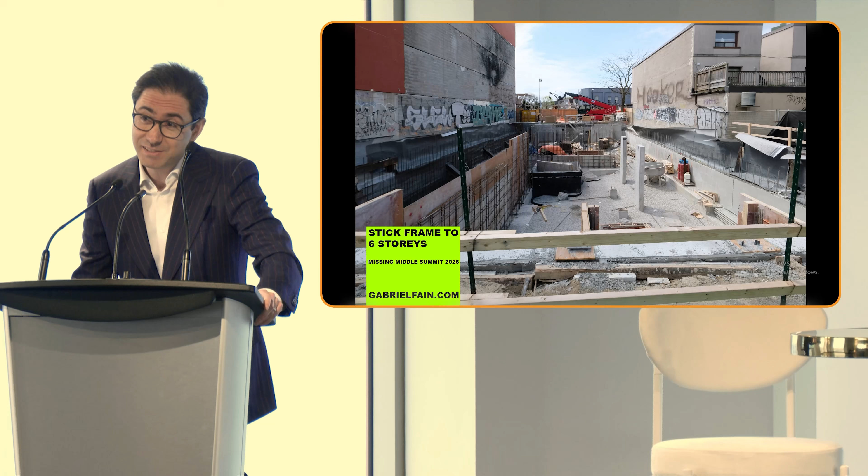This is a picture I took last week of our project, which Chris spoke about. It's close to his office, 2760 Dundas. I think it's one of the only, if not maybe two, stick frame six-story buildings under construction right now.

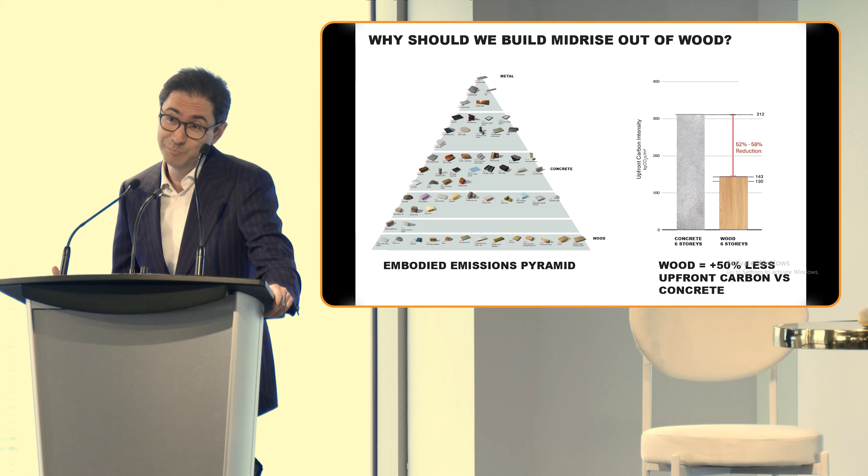This is where the conversation starts for me. If we care about the health of our cities, we really need to think about what kind of materials we're building out of. Concrete and steel have incredible carbon embodied emissions. When we compare a six-story building built of concrete to one built of wood, there's about a 50% reduction in the upfront carbon emissions of the wood building. So we really have to think about fundamental questions about sustainability having to do with materials.

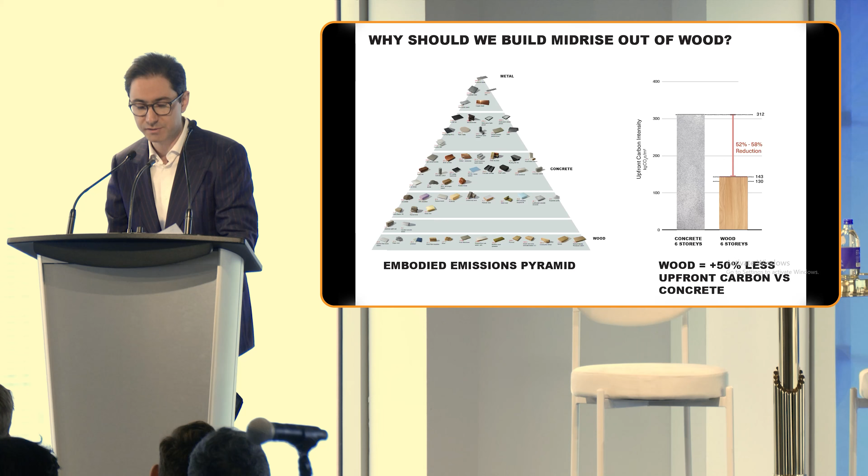I'm interested in simplifying buildings, and for me the only way to do this is through wood construction, because ordinary construction systems scale well. They rely on local labor, local materials, local supply chains. They're lighter, faster, and cheaper, and as the previous speaker said, time is money.

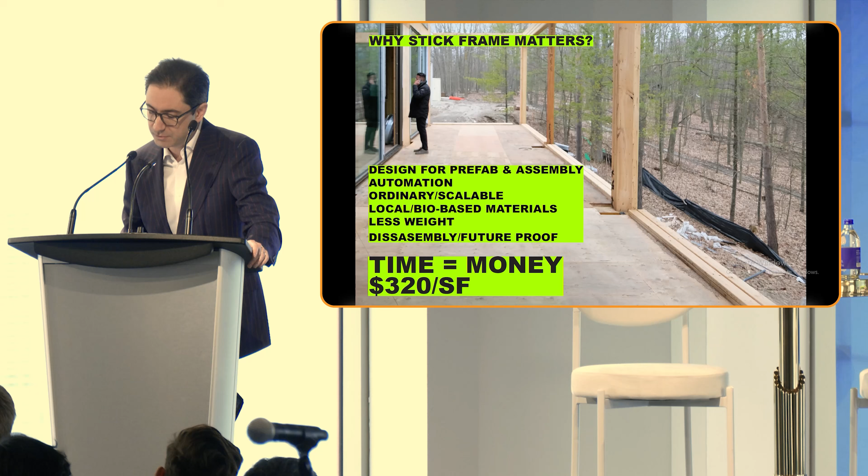A lot of people are going to ask, well, what's the cost of this? Our Dundas project is coming in at around $320 a square foot, and that's including all the complexities of the below-grade construction, which includes significant shoring.

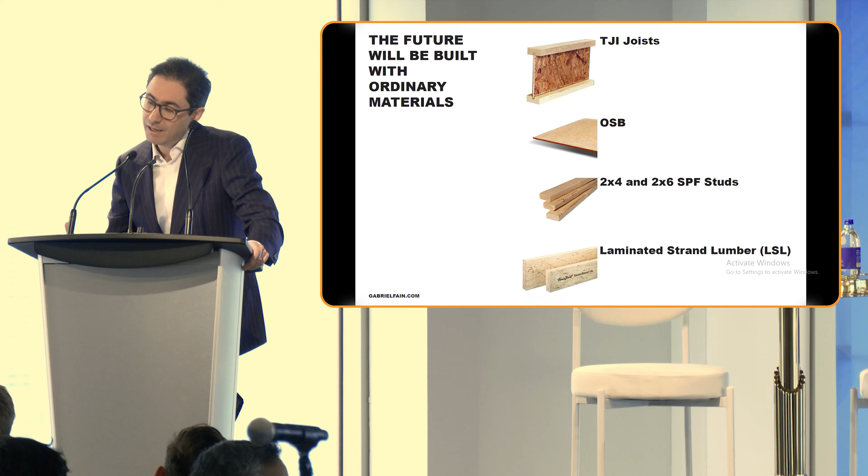I think the future will be built like this, with ordinary materials: TJI joists, 2x4 and 2x6 studs, LSLs, OSB sheeting. This is the future of mid-rise, not some exotic materials coming from somewhere else—it's right here in our own backyard. The only change required is the level of coordination we need, and the kind of building modeling and assembly process.

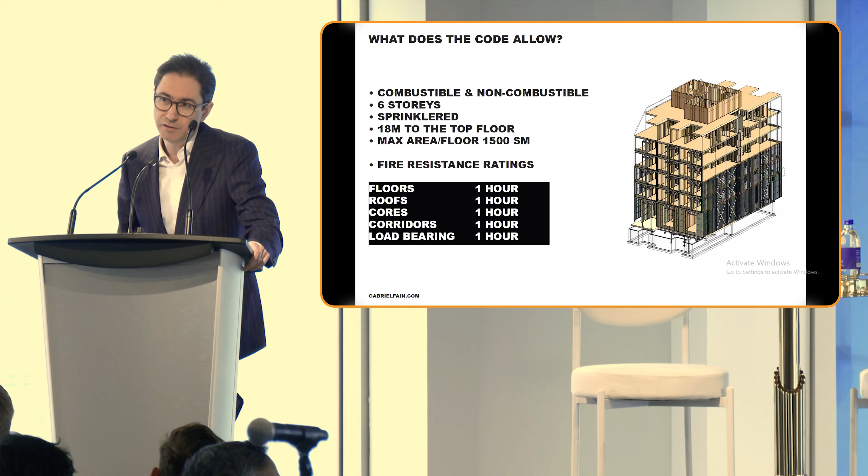So what's stopping us from building this way? There's a misconception that the codes don't allow us to build at this scale, but in fact, in 2015 the OBC was changed to allow six-story wood buildings, as long as you follow certain parameters: sprinklered, 18 meters to the top floor, maximum floor plate areas, and fire resistance ratings typically of 1 hour within the residential separations.

There are significant challenges to building this way. The three top challenges are sound, fire, and moisture—there are many others, but those are the top three. You really have to be rigorous in how you design these buildings. But these are solvable technical problems, not conceptual problems we need to overcome.

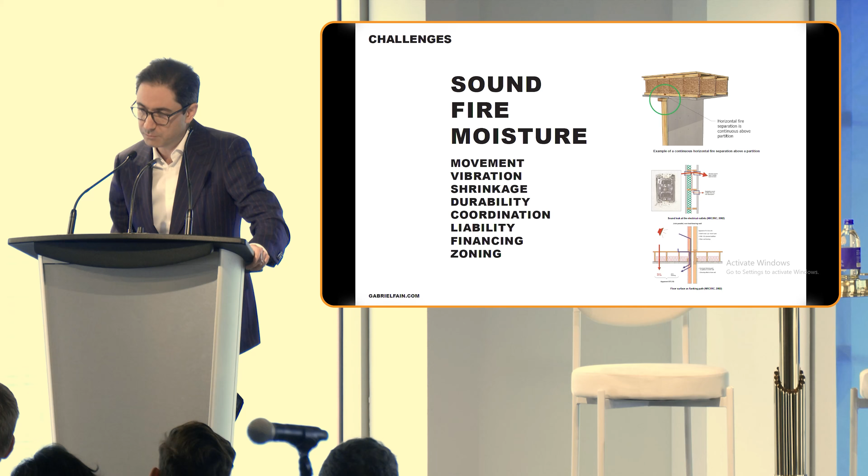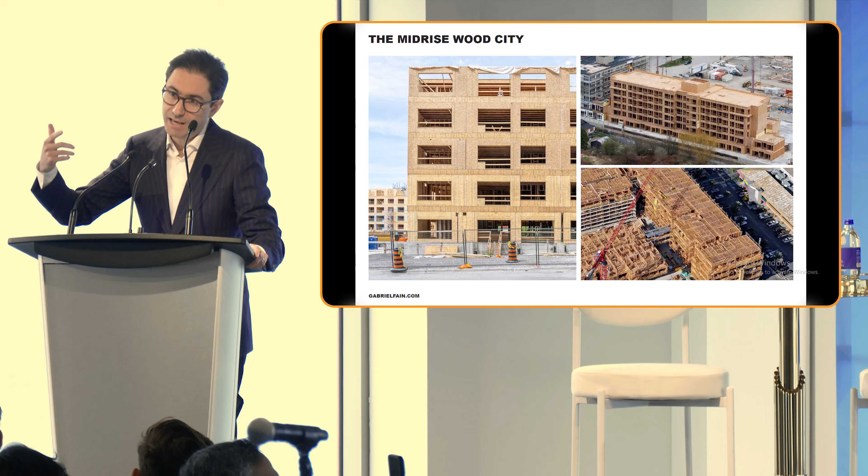In many ways, Toronto is really behind on this type of construction system. In BC, where many of these photos are taken, they've been building mid-rise wood buildings for many years, even before 2015. Once a couple of successful projects get built, the industry rapidly gains confidence, trades gain confidence, and even municipalities start to understand what's happening, and a new normal begins to emerge.

So the question is, what could Toronto actually look like if we embraced projects at this scale? Not isolated pilot projects, but entire corridors of wood mid-rise buildings, kind of like how we saw the housing stock of the early 20th century being built in the city.

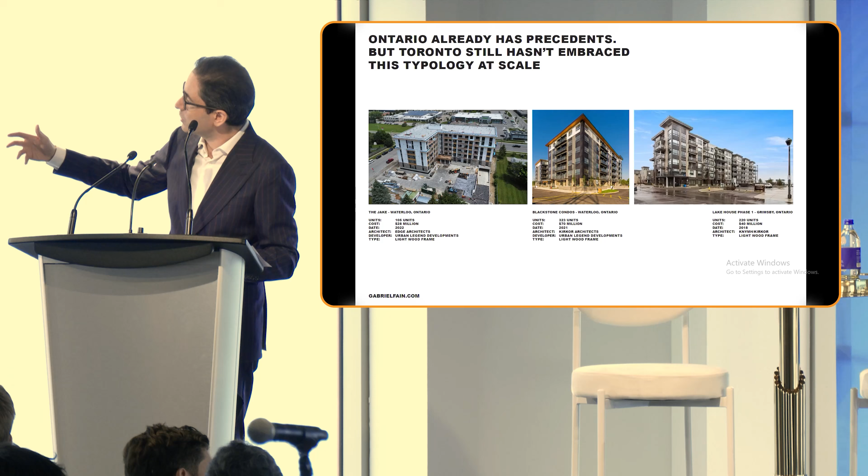What's striking is how few examples I could find in Toronto. In fact, I couldn't find any examples in Toronto of stick frame six-story buildings. We're finding more of them in secondary markets like Waterloo and Grimsby, which obviously benefit from larger sites and larger staging if they are prefabricated.

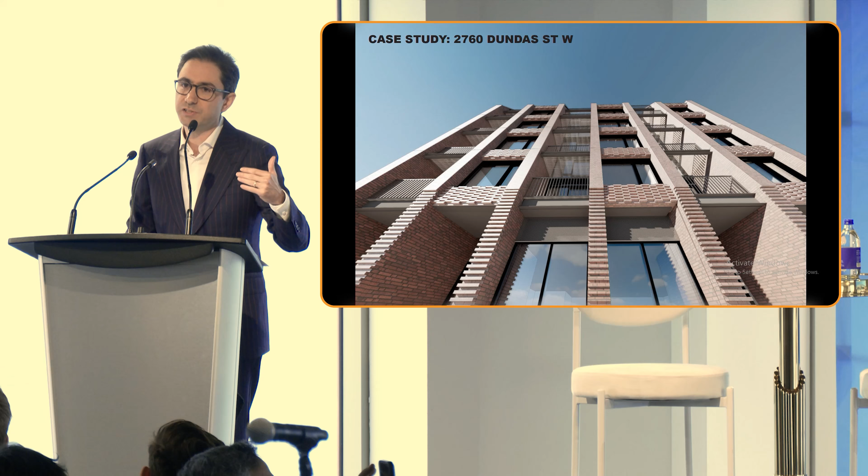So our project at 2760 Dundas really became an opportunity to test these ideas at scale. The project forced us really to think differently about structure and also design.

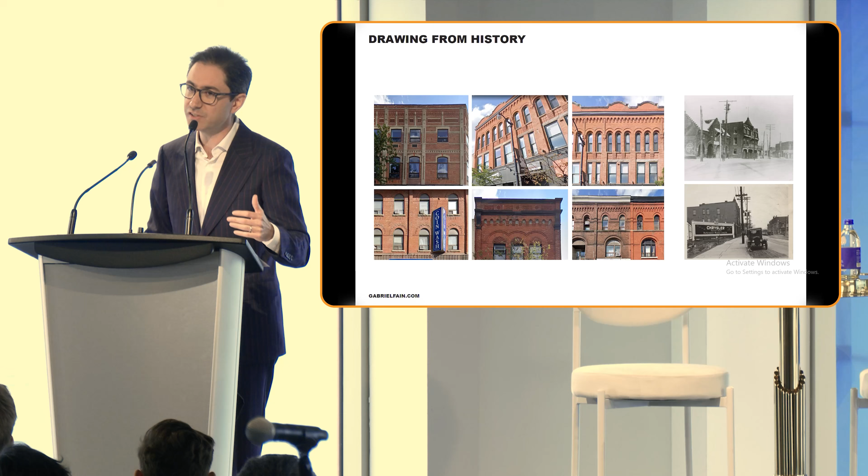The project's located in the Junction, which is really important to understand the kind of history of these kinds of buildings, because many of Toronto's older buildings were timber buildings clad in masonry. So there's a kind of logic and rhythm to these buildings which feels timeless, but really inherently their logic is based on their construction system.

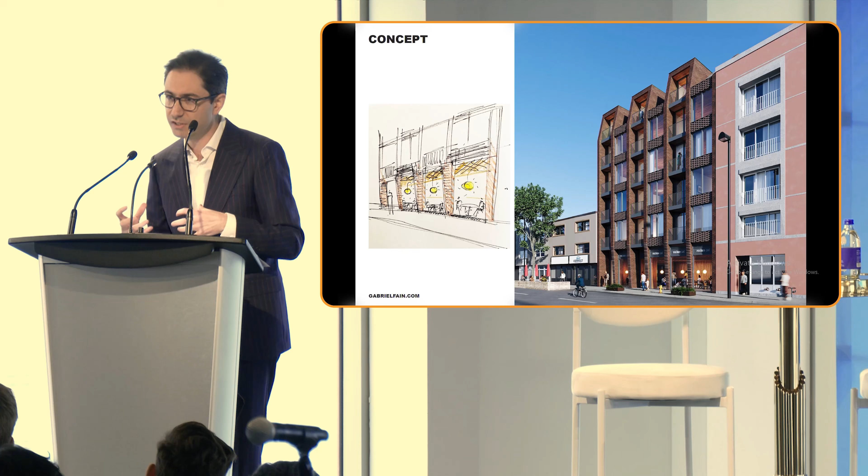So the design really wasn't about inventing something new. It was taking the DNA that we already have within the history of these buildings and adapting them to new technologies using traditional construction systems.

And so this is where I think architecture starts to change, because we really have to think differently about how we plan these buildings. Wood inherently has different kind of lateral systems than concrete. You have to think differently about how you stack the plans. Alignment becomes really key, and simplicity becomes really key.

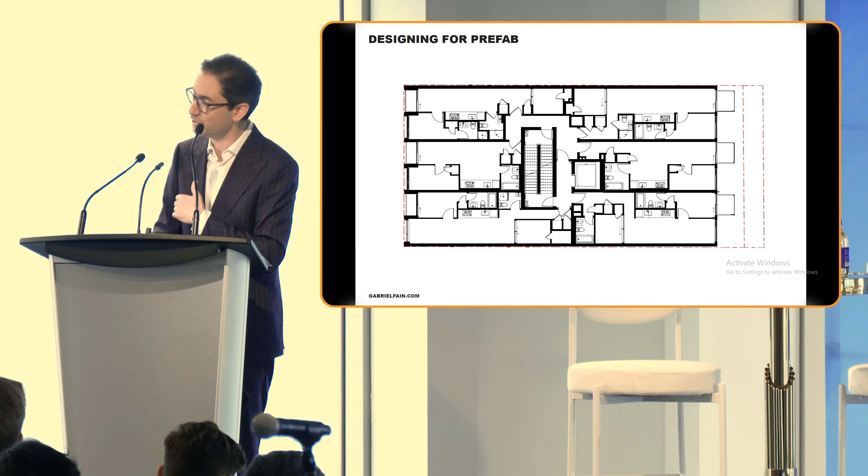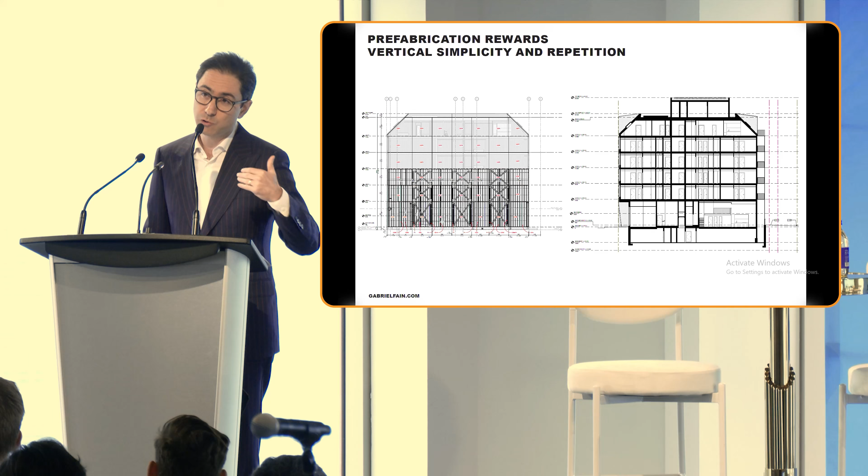So on Dundas, for example, our challenge was to really negotiate the height of the retail with the section, and also understanding the requirement to meet unit mixes. So that all had an impact on how the building laid out in an otherwise very simple form.

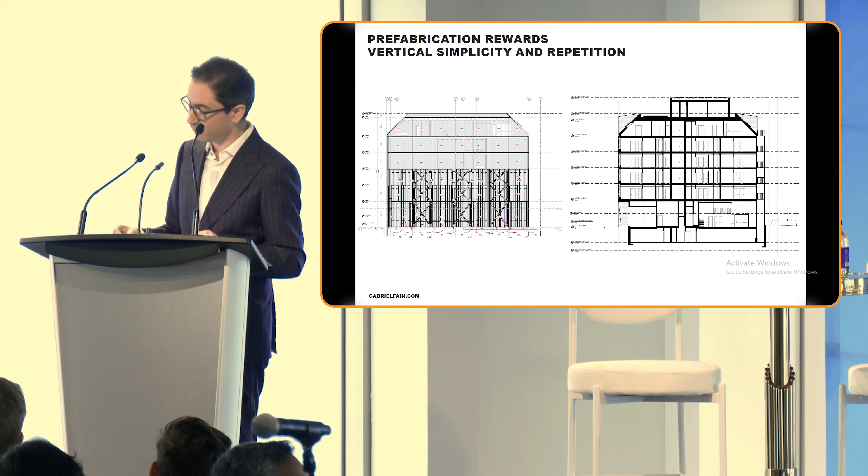So because there are so few examples of these kinds of buildings, we had to invent some new details. And one of them was this balcony detail, which became a major problem because of the amount of steel that would typically be required to do balconies.

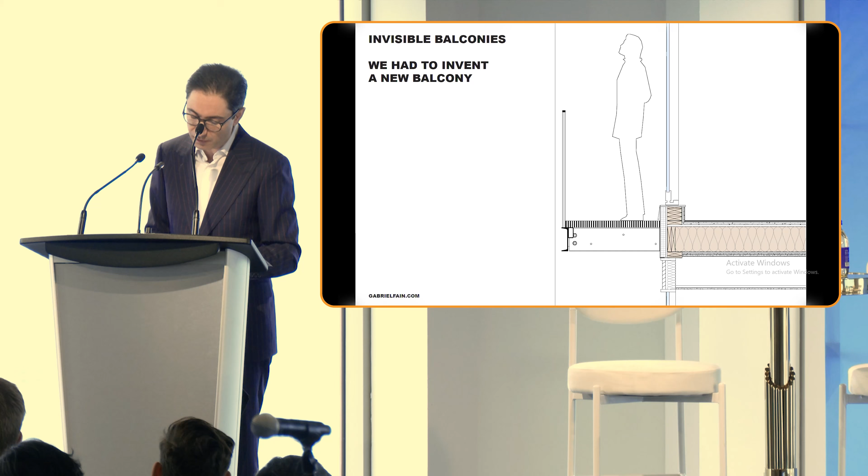So we came up with this idea of the invisible balcony, which is a very lightweight 2-inch steel grate that's supported on very light steel. And for me, this is where really innovation happens - it's understanding how the construction constraints can lead to really interesting architectural moments.

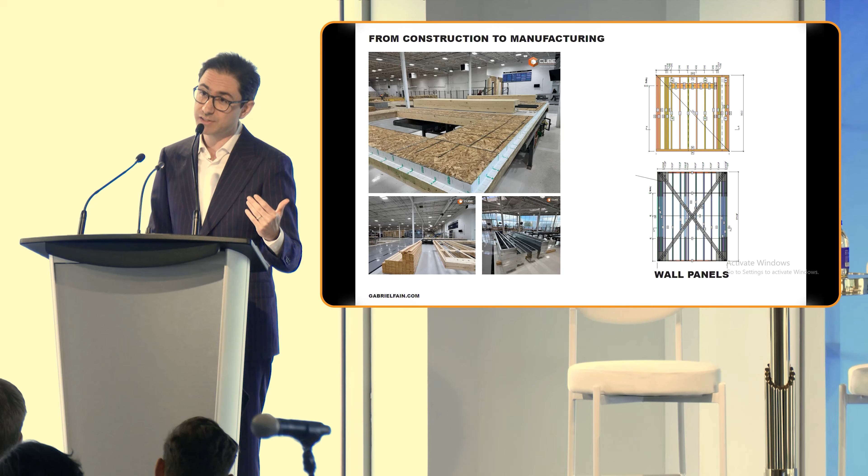But the wall panels are going to be prefabricated in a very controlled environment using digital processes and then assembled rapidly on site. So that really changes quality control, it changes how the labor dynamics work on site, and it changes scheduling and I think reduces risk.

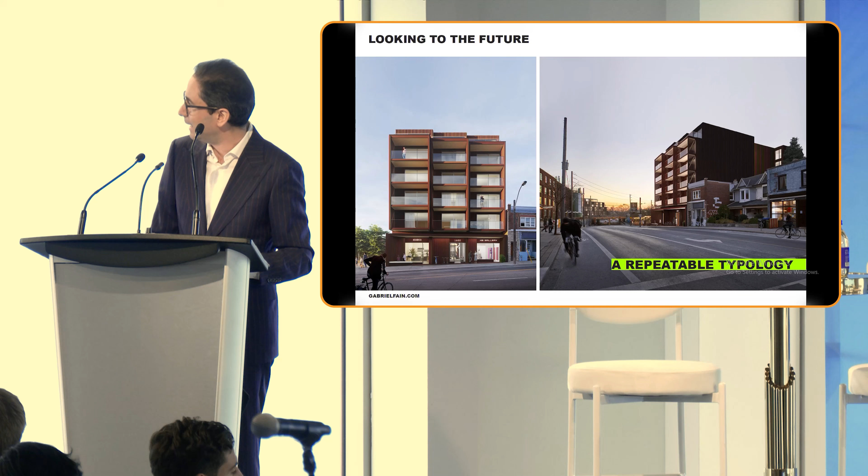So what excites me the most about this kind of idea is really, it's not just about one building. It's about repeating this over the entire city, and repeating this urban typology in many different mid-rise sites. This one's actually down the street at 1650 DuPont, which hopefully one day we'll also build.

And so finally, the public imagination is really important in this kind of discussion, because if people can imagine themselves in wood buildings, then the stigma around fire and sound and leaks and water all kind of start to become diminished.

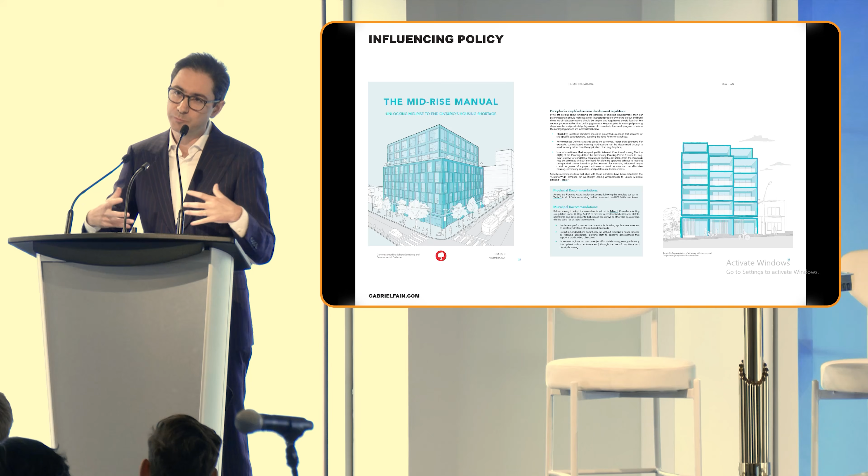Also, finally, the idea of policy really matters. We need performance-based zoning that actually has an understanding of the kind of construction systems that we're using for these buildings. This is a study that LGA and SVN did. Conrad was really instrumental in putting this together, but they actually used our Dundas project as a way to promote this idea of simplified zoning parameters that are based on how you're building these buildings.

So I'd like to end with this idea that we really want to build the city that we ourselves want to live in. This is a photo by Double Space showing this emerging neighborhood of mid-rise buildings in the Junction. And what's exciting for me is that the newest mid-rise building within this tapestry of buildings is going to be built entirely of wood. Thank you.